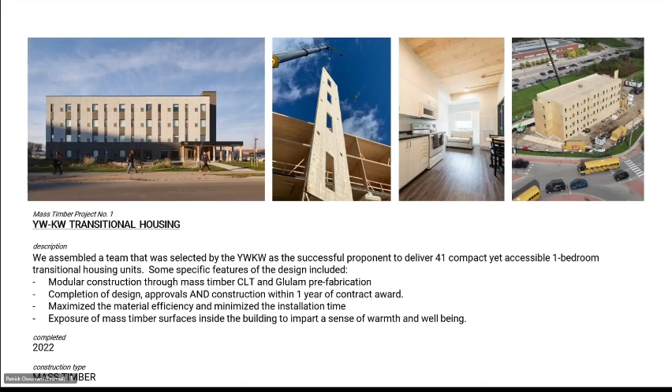Having been someone, along with Patrick, involved in and very interested in the mass timber movement for well over 10 years now, and seeing inroads like the Brock Commons project we saw earlier, you start to realize it's always about incremental gains project by project. So these were some of the key and ambitious targets of this project, which we'll show as I flick through pictures of the completed project and how it was executed.

I don't have any sort of weird twitch, but my cue for Patrick to change slides is to touch my nose. So just so everyone knows, we'll let you behind the curtain on that.

So you can see here some of the finished pictures. This is a really good view of the overall site. I'll get into the entire group of stakeholders outside of our design build team, which included the Region of Waterloo, the City of Kitchener and various others. You can see the building in the foreground, which was building 1. This picture was taken this past fall, and there's a second building going up. We were successful on the first building to the extent that we've done a second building adjacent. Behind is St. Mary's High School and the Kitchener Public Library as one large building.

And you can see that parcel of land that's really bordered by Blockline Road and a number of other more minor streets and roundabouts, that it was really an underutilized piece of vacant land that was city owned. And so being able to capitalize on taking this building type and dropping it in here was quite the feat.

One thing also just to note too, before I get into some more specifics on the process, the housing for building one that you can see, which is a 4-story building, was transitional housing for women battling homelessness. The second building that you can see, the 3-story building, was actually supporting women with children, so families.

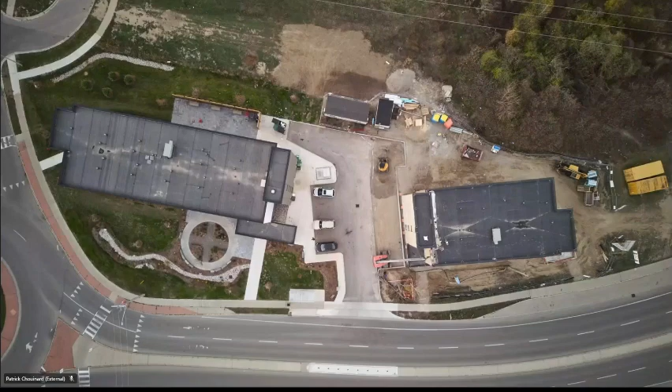So just wanted to give a high level on the Rapid Housing Initiative. So this project for YW was funded through the CMHC's Rapid Housing Initiative. As some of you may be familiar with, the RHI program was first announced for round 1 back in October of 2020, which was around $1 billion of available funding for not-for-profit and supportive services organizations to provide much needed housing for specifically vulnerable populations.

So both the RHI program as well as the National Housing Strategy from CMHC really look at a human rights-based approach to housing, and I think for our team, for our firm, that's something we're very much in line with, about how we can do that in an inclusive way with our building solutions, so that a certain type of construction isn't stigmatized to one specific type of population. So that was important for us.

One thing also about round 1 is there was a requirement, in addition to the 12-month timeline from contract award to occupancy, again, very aggressive. There was also a specific focus on modular construction as part of round 1 of funding. For us, in this case, we were able to utilize the prefabricated nature of the system out of the Element 5 state-of-the-art facility as meeting that definition.

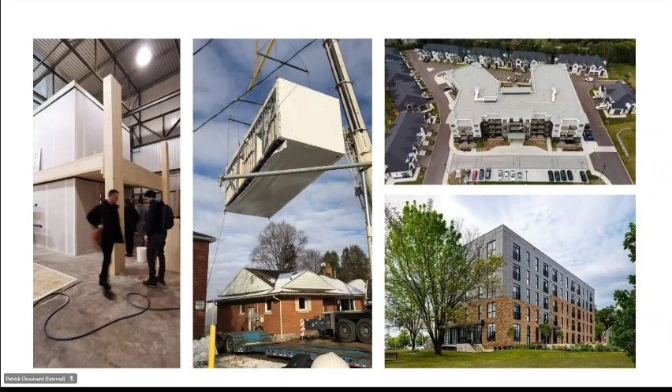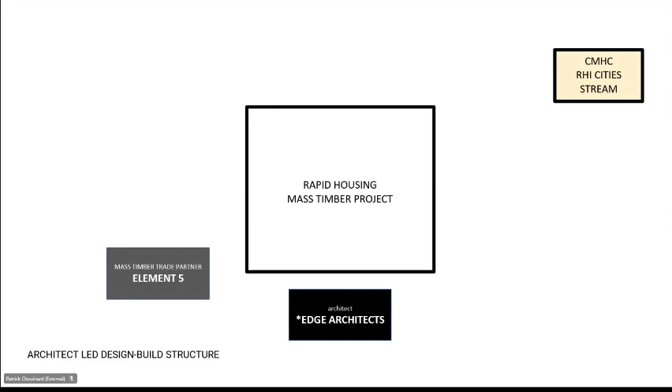So when it came to the announcement in October 2020, that's again where we had that pre-established relationship with Patrick and Element 5. So there were some conversations that we had early. We were also, again, very tapped into the local supportive services provider market, and everyone heard about this RHI funding stream that was coming down. So we started some really early conversations between Patrick and myself, and then started expanding the network and group in terms of what could a team look like and what could a delivery model look like for achieving the objectives of this RHI.

When everything came together, we had Melloul Blamey come on as our really key player and our general contractor, and our work with Melloul Blamey has often been as that construction manager and someone who really takes that huge amount of ownership in the work. And so they were able to come to the table with a specific response to the RFP request for a CCDC 14 design build, basically a turnkey solution to the funding and the objectives that were laid out by YWCA.

And then along with Melloul Blamey and their leadership on the team in that direct contractual relationship with the client, off to the right hand side, we had all of our trades and consultants that were brought on, and not in a conventional way, but actually in almost an integrated project delivery type of model. Even though we were tied into using the CCDC 14, it was this definite idea that we have to get everybody at the table very early and have that communication and those lines of collaboration really strongly established.

And not only did it stop there, but as you can see up above, the Region of Waterloo was the source that the funding came through, the city stream RHI, and then the City of Kitchener was actually the landowner. And so between the two groups, even in our multi-tiered system, it was really essential that they were at the table, not as something that we were working against. Oftentimes with approvals authorities there can be some friction in terms of how to move things through, and a lot of complaints about timelines to get those approvals, permits and alternative solutions. We were able to avoid that by having them very much be stakeholders in the project, and that helped greatly as well.

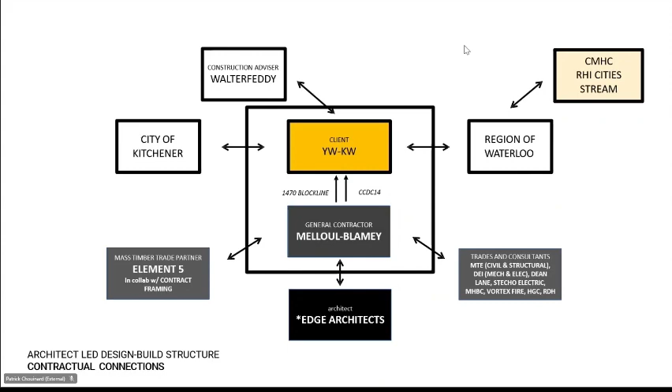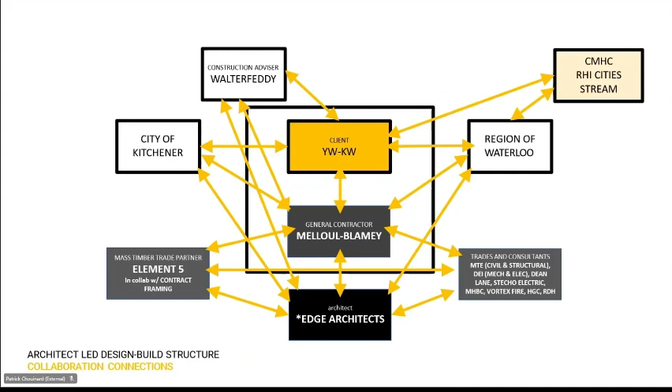So again, as you can see, the collaboration and connections between all of those groups, we really fostered them and pushed and promoted them as much as possible. And that was a really key piece. And I'm sure Jeff and maybe some of the others are going to go into that a bit more.

So in terms of the overall process, in order to work backwards from this extremely aggressive rapid schedule of 12 months, we really had to break things down into major sections and major deliverables with timelines associated. And so this was an infographic that we used at the table with those groups, not just our internal team, but the entire stakeholder group, including the authorities having jurisdiction.

So really it was about how quickly can we fast track and get through that planning, approvals and permitting process? Then how can we minimize and make the site work process go as quickly as we can, along with the foundations, right on the heels of that? And how can our design be done in a way that helps to streamline that? Same then goes with the superstructure that we're going to see with our time lapse.

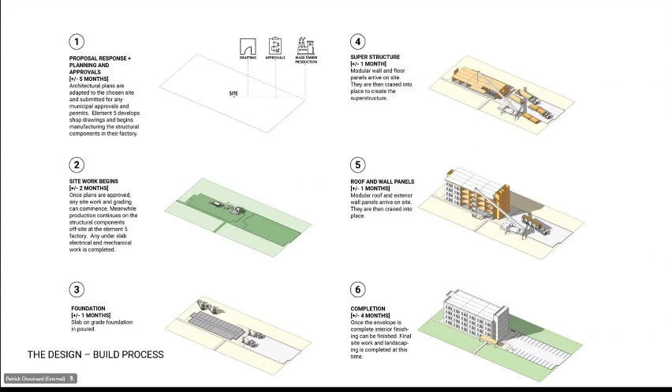The superstructure and that rapid assembly of the prefabricated components was a really key aspect of the project, and looking for ways that we could make that as efficient as possible, but do it with expertise of the whole team and of the checks and balances. And then finally, obviously leading to the full completion of the project. Next slide.

One of the key parts in terms of the mass timber itself was really trying to optimize the structural properties of mass timber, and having Melloul Blamey on board was really helpful at the early onset, knowing that we had to be competitive in a RFP tender, that our pricing had to be in line with some of the other groups coming in, but yet we did believe in this mass timber solution, because of the timing specifically, if we could get the efficiency optimized.

For a lot of us in the design community, mass timber had at the time been considered a high-end or expensive product, so we thought we could capitalize on something as simple as what is the optimal range of the mass timber panels, how are they supported, and how does that compare to something like precast. Melloul, with their extensive experience working with precast and their historical data, was really helpful.

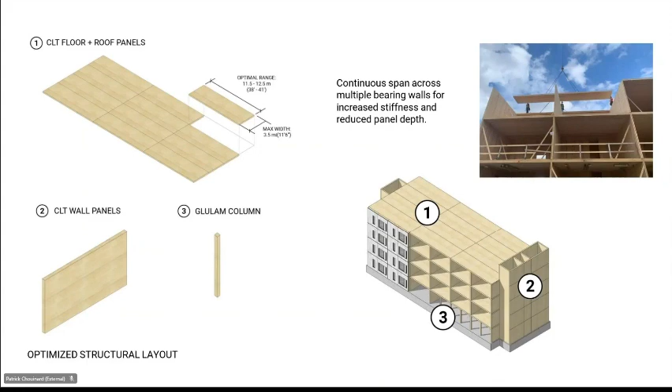Same thing was in the stairwells. Obviously on a 4-story and a 3-story, we were able to fully take advantage of that optimized span for our cores and vertical circulation through the space, as you can see here in the finished image.

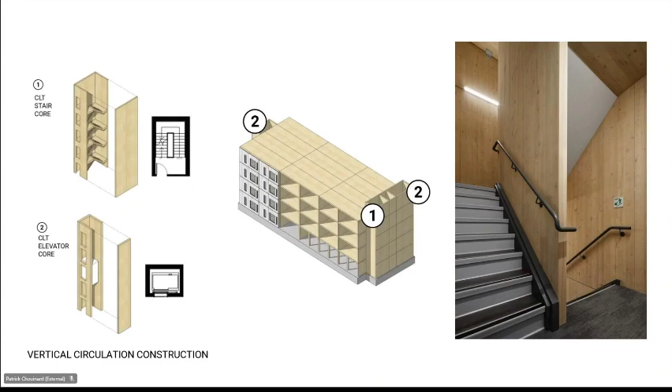And then in terms of the overall building layout, it's a pretty typical slab style building. However, if we go to the next slide, the typical width of that type of slab would be in the 18 to 20 meter range. In this case, we had a program requirement from YW that they wanted specifically smaller units. And we also had some site restraints of this vacant land parcel that had some weird geometry to it.

We realized if we used both of those things and narrowed the building footprint, we'd ultimately get the unit area that we needed, but also with a very flexible and adaptable unit layout that we knew we'd be able to adjust over time to suit the needs of other types of programs, and also create a very comparable apples to apples building layout that we knew would be scalable and adaptable in the future.

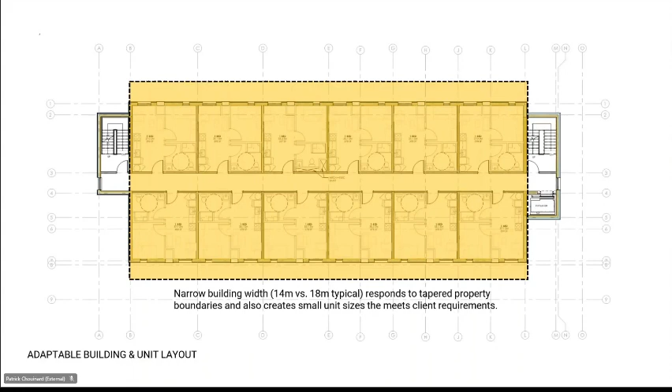So in terms of the unit layouts, one of the really key parts was knowing that this was transitional housing for women coming from very vulnerable situations. The ability for them to have a door that they could close when they went to sleep was really important. It was driven by the client, but also from us. We didn't want these to be shipping container, bowling alley style units that weren't going to create that sense of warmth and well-being.

So one was through the programmatic use of the space, that more squared proportioned unit that would allow us to not have large, super generous rooms, but rooms that were very functional for the needs of the actual user.

And then layering on top of that, the idea of exposing the mass timber surface in order to get those biophilic advantages, the sense of warmth and well-being. Seeing very literally the women that are coming in and moving here, coming from encampments, coming from homelessness, and being able to see in real time that value come to life was pretty special.

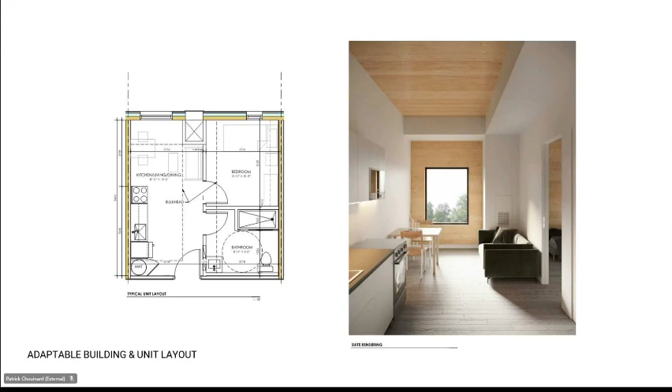So one thing, obviously, and I won't go into too much detail, just because we did have Vortex Fire Solutions on the team, who offered a lot of expertise and a lot of ability to be able to connect this wealth of testing data. And as Brock went through, that is something that in the industry there is quite a bit of right now. So a lot of times it's about taking that testing data and taking that conceptual understanding of how mass timber performs in fire, and just making sure that there's a comfort with the building departments and chief building officials.

And so one of the key things we did on this project was actually find other projects that had alternative solutions approved, particularly in the GTA, and then made the connections, not just with the documentation, but actually with the personnel, so that the collaboration wasn't just happening between us, it was actually happening between other building departments in various jurisdictions, so that they could understand and get that comfort. And we fostered that type of dialogue.

We've continued to do that. So now, every time you bring someone onto the team on the approval side, you actually have an ally and a resource that you can use. And we've since obviously expanded this program and executed it in York Region, multiple projects in Kitchener, and we're looking to continuously grow that with even a project upcoming in Hamilton with this same team.

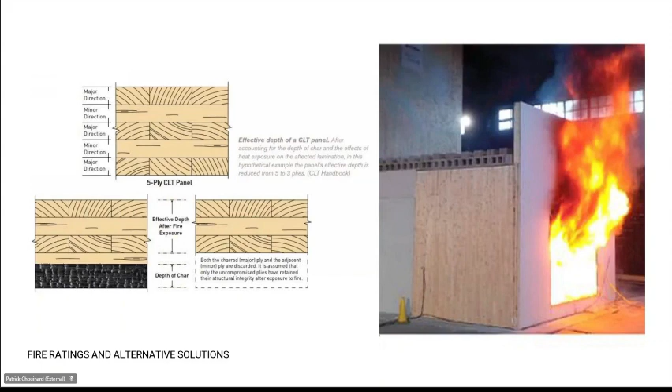Acoustics, I think Jeff might touch on this briefly, but that's one of the areas that's unlike the fire performance. Fire performance, there's been a lot of testing done. There's a lot of documentation available out there. The acoustic performance, particularly of exposed CLT, there isn't actually that much data out there, and combating that along with a specific change to the OBC classification of residential acoustical performance, where it went from 50 STC basically down to a 47 ASTC, actually made it challenging for us on the fly.

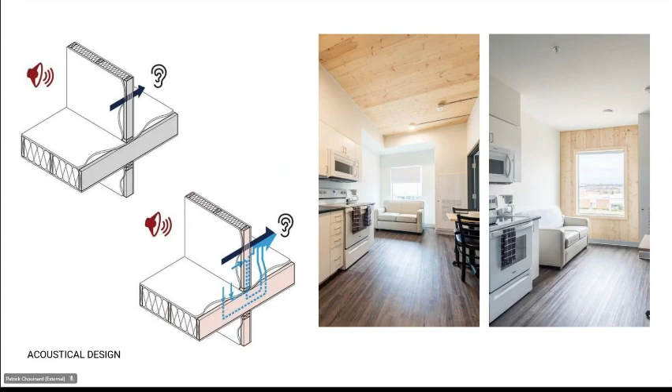So this was one of the areas where we really had to, in terms of both lessons learned and utilizing the expertise of our team in terms of Element 5, Melloul Blamey, and HGC Engineering, who we brought on. We ended up having to, in the moment, come up with a way to deal with something called flankage, which is when you have these exposures and that structure spanning over multiple points of bearing, it opens up this ability for sound to flank through those cracks and crevices. And that was something we had to deal with in real time.

And so what we ended up doing was coming up with a somewhat innovative checkerboard design solution where every other unit had either an exterior wall or a ceiling exposed, and that way we were able to get that advantage of the warmth and well-being that I stressed, but yet also do it in a way that we were dealing with a worst case scenario and a very conservative design.

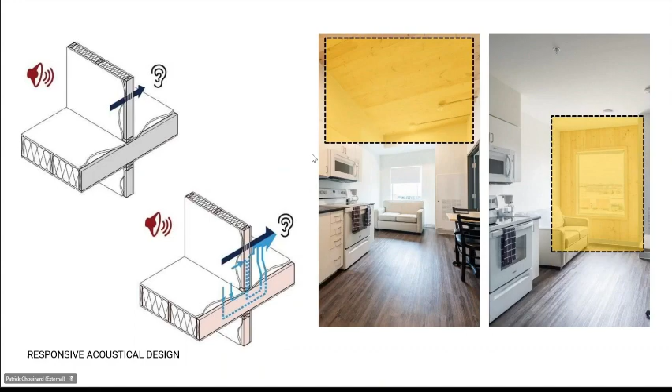After we were able to do this, we worked with HGC to actually get acoustic testing completed, because the challenge is HGC had to sign off on the design, but they didn't have a body of testing data that was robust enough for them to do it without going very conservative. So luckily, we're happy to report that between the testing of this and a few other buildings over the last couple of years, we've actually been able to show that the product performs better, particularly in flankage and exposed conditions, than was previously designed to. And so that was one of the great takeaways for us on this project.

Ultimately, we realized, just because of some of the procurement challenges, some of the fabrication facility setup things, and this timeline, we ultimately ended up going with a thickened insulation EIFS system that was very high performing, with very minimal thermal bridging. So we knew it was going to be high quality, but it also really limited the number of trades and the number of steps in the process required to do it, which allowed us to ultimately meet the timeline.

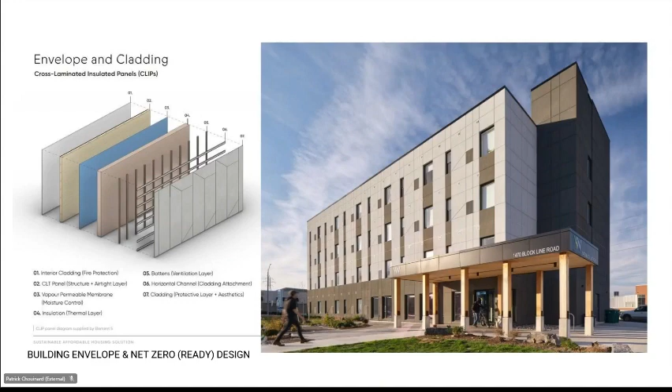So that's something I think we're keeping on the boards for us in terms of looking to ways to evolve and refine that, but specifically having RDH on the team, not just through the design process, but in terms of the actual execution on site and the checks and balances that were in place for the envelope, as well as the moisture control, was really key.

So finally, when it comes to the BIM coordination, and you can see Kurt, our installer here on the truck, there was a lot of BIM coordination done with actually all the trades and consultants in the early stages on the design, and that was a key component. But I think with specifically this rapid style delivery, what's also really critical becomes the collaboration in the field. And that was something that was actually really exciting for us.

And I think for all of the consultants, it necessitated us really being there. And again, more that triage approach to all be there at the table consistently. I believe we basically had a weekly meeting that started at the beginning of the project and ended when the project ended. There was that consistency to everyone's engagement in this fast track approach that was really unique and exciting for us.

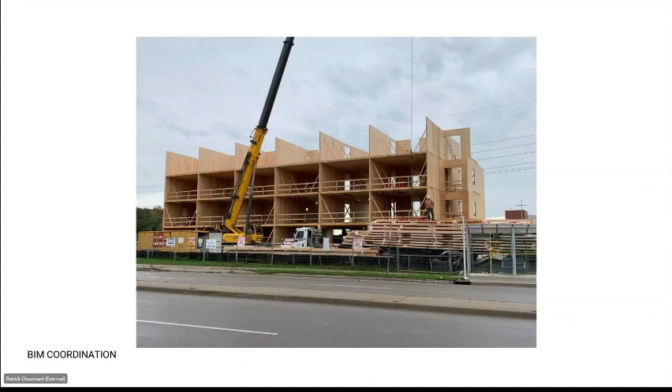Yes, thank you, Matt. So we wanted to demonstrate how quickly we thought the building was going to assemble. So we placed a time-lapse camera on the adjacent building. I'll just let this video play in the background. It's short, it's about 2 minutes. What you'll see is the first day that our materials arrived on site. Within 8 days, you'll see that 2 stories of the building were assembled, and within 20 days, the superstructure of the building was completed.

So let me just make sure that the volume is turned down here. And I'll allow this to play. I don't think it's a big deal, Patrick, but we don't have the volume on here. Yeah, that's okay. I've decided to turn the volume off. Can you hear me? Yes, we can. Great.

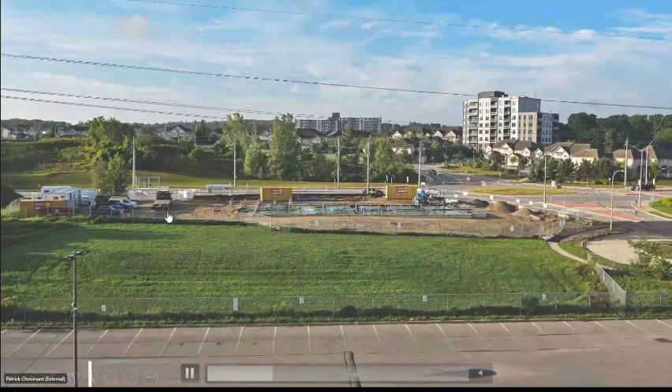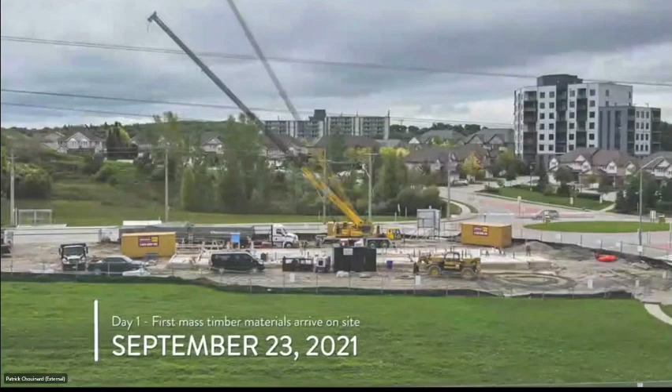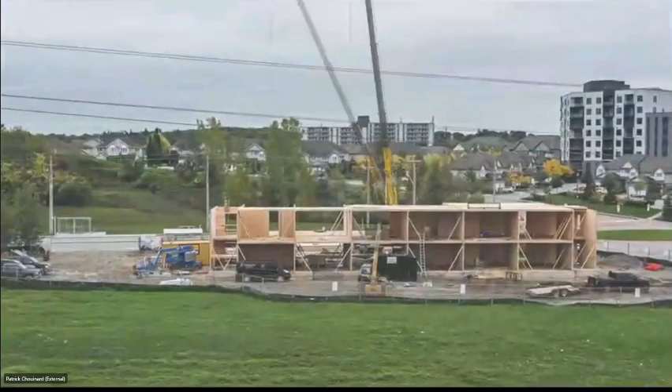So here we are. This is day 1, September 23rd. This is the first day that our materials arrived on site. Every panel is pre-cut in the factory. There's no cutting of the materials on site. Here we are, day 8, October 5th, and you'll see 2 stories of the building having been assembled. You'll see our exterior wall panels being erected here soon. Those are about 10 feet wide by about 45 feet tall.

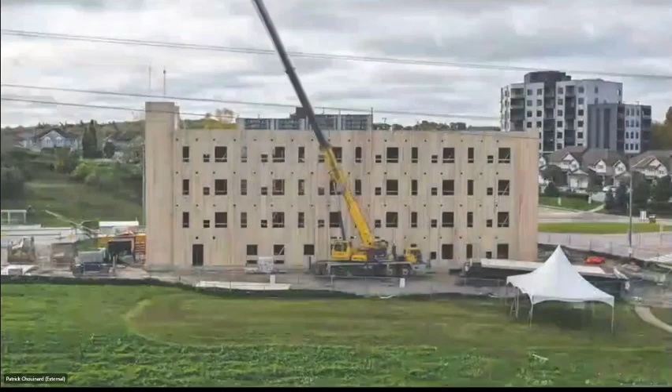And here we are, day 20. So within 20 days, we were able to assemble the entire superstructure for the building.

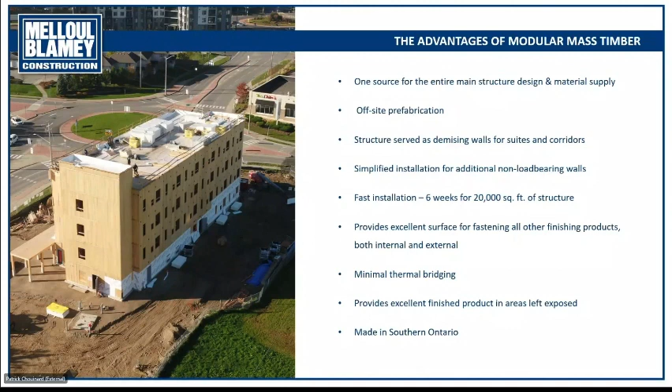And as I think Matt and Pat also mentioned, it's made in Southern Ontario, but as far as I'm aware it's the only facility that manufactures in Ontario. So that's pretty significant for procurement and getting the product delivered to your site.

The one thing that you want to make sure of is the foundation. In this case, we had a slab on grade, and it had to incorporate all the specific anchors. And when that work was done, we basically had a concrete slab when they arrived. It made it very easy for the installation when all the anchors were done properly.

The next piece is to ensure sufficient moisture protection measures are implemented, just because of the wood nature. There's no doubt that the CLT is very dense. It's the joints that you have to be prepared for, and when the proper measures are specified, with tapes and other types of membranes that can go over, it's very easy to achieve the moisture resistance that you need until you get a roof on.

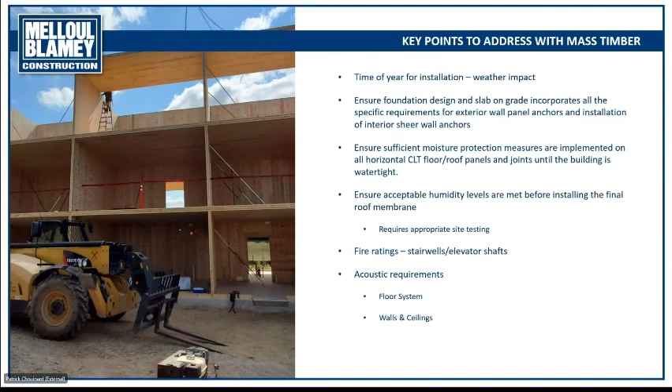On Matt and Patrick's side, we were trying to expose everything, but that wasn't possible in this. But I think this particular job did lend itself to testing that's going to help the whole industry, because it was one of the first of its type to go out. So we learned a lot, and hopefully in the future more timber can be exposed because of that.

But with the structure that we did, the size of it, to be done in 6 weeks so we could start a roof right away, that just helped us in the overall time frame, probably by about 2 months at least, to get a jump on having the building watertight and finishing inside.

And last, the biggest thing was the significant advantage of having one trade doing both the wall and floor system and the whole structure. Again, it was just a time saver. So it was really a good learning curve for us, and now we're full proponents of mass timber construction.

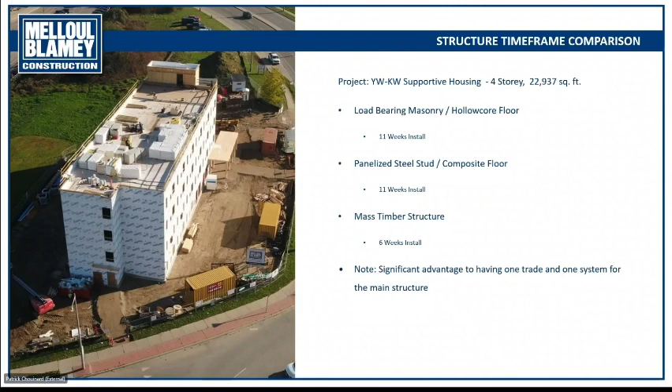My name is Jonathan Smegal. As was mentioned, I work for RDH Building Science, and so I was asked to talk a little bit about the enclosure considerations for CLT or mass timber construction, as well as some of the input we had on site regarding water management as well as design.

So first, what value does RDH bring to the project? Well, besides being locally in town, just down the street, which provides a lot of convenience, we have a lot of experience with mass timber over the last several years. Our largest offices for RDH are on the West Coast, and that's kind of where mass timber in North America reemerged several years ago and has moved over to Ontario after that. So we had a lot of experience on the West Coast even before it came to Ontario.

We've had experience in design, construction, walking the site, as well as dealing with lots of different failures and challenges that have emerged as part of this relatively new construction technology. RDH has written a few industry guidelines, including the mass timber best practice and moisture risk management strategies. We've also run two multi-day symposiums on mass timber, one on the West Coast and one in the New England area. We've done a bunch of field testing, as was just mentioned.

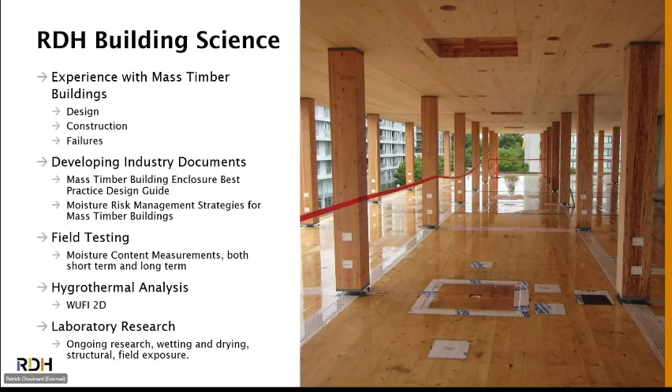And the fire control that's been mentioned a couple times. Just in June 2022, there was the full-scale fire test at the Canadian Explosive Research Lab. The photos that Brock showed earlier were from that test, and the results were quite good based on that large-scale test.

So some of the challenges with mass timber is that wood is a hygroscopic material and is moisture sensitive, so it will absorb water. And the amount of absorption is dependent on the orientation of the wood. The end grain, obviously, absorbs more water than the other surfaces, and so we need to be careful about that, and we need to take time to protect it.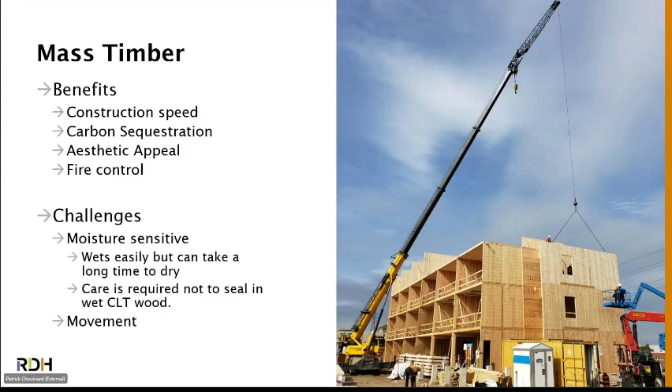And another challenge is movement, not necessarily with large CLT panels where everything's glued together, but with other types of mass timber like NLT or DLT, we can get movement and expansion, which can cause challenges. But in CLT also, if you wet and dry enough, the individual pieces that are glued together on the different layers will expand and contract separately. And sometimes we've seen over extended periods of wetting and drying that they can start to separate a little bit and leave checks, leave cracks, and separate from the glue.

So specifically regarding this project, as it was mentioned, the upper image is kind of a graphic from one of our guides, and the bottom graphic is specifically from this project showing the assembly. One of the nice things about CLT construction is that because of the aesthetic value of leaving exposed CLT on the interior, it often lends itself to the perfect wall construction.

And I don't know how many people are familiar with what we refer to as the perfect wall. It was a phrase coined many years ago now by Joe Lstiburek in one of his documents, but it's gone by a lot of other names like the outside insulation technique, or called PERSIST in the past. What it means is that you have the structure on the interior of the enclosure, and then on the exterior of that, you have all your control layers that control water, air, vapor, and then you have your insulation on the outside of that.

And so what that does is it controls the temperature fluctuations and extremes of both the structure and the control layers, improving the durability of those. There's often less thermal bridging because you cover all the ends of the floors and everything that sticks out. And in this case in particular, the insulation and the cladding was an EIFS finish, and it was adhered, which means that there were very, very few fasteners bridging through the insulation. And so there were lots of benefits there.

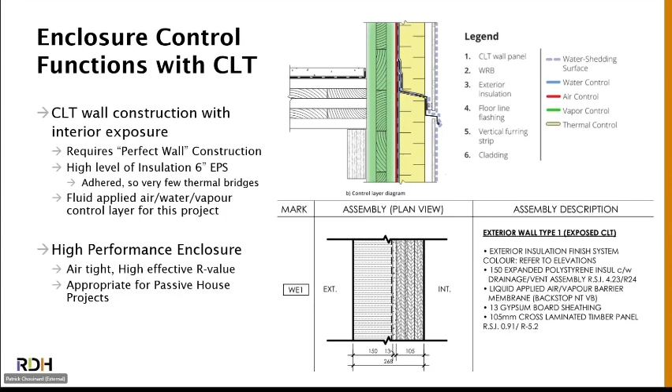One of the other challenges, besides the wetting challenge, is some air control challenges. In this project, because everything was on the outside and it was a fully fluid applied air, water, vapor barrier, it was not as much of a challenge. But we've seen a whole range of these types of buildings. And what happens is anytime you have 2 panels coming together, you have a possible air leakage path under pressurization. Pressurization can occur due to mechanicals or due to stack effect in taller buildings.

And this can lead to air leakage both through the panel joints, but also in some cases, depending on the panel itself, if there's cracks or small joints between the individual pieces of lumber that form up the plies of these CLT, you can get air leakage through those. So for example, if we look down this parapet, this was not the finished parapet. There was a self-adhered membrane that went on the inside surface of this parapet just for this reason.

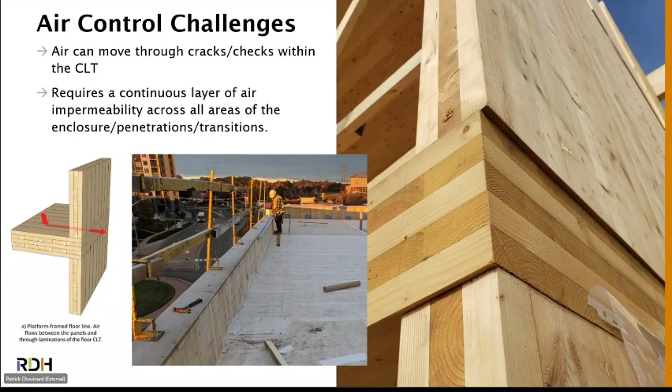But if you look at the waterproof membrane that goes across the roof and then up the parapet, it is possible, if there were joints between those pieces of wood, that you could get air movement all the way from the interior to the exterior of the building across the roof system because there'd be gaps between the wood. So you need to take that into account in design. And that's one of the other main challenges of these mass timber systems, more with dowel laminated and other types where there's larger intentional cracks, less so with the CLT, especially as you can see in the photograph, the joints between the pieces of wood were quite tight.

So the greatest challenge to mass timber construction, as has been pointed out, is keeping the wood sufficiently dry throughout the project. It's not that the wood can't get wet at all, but you really need to be careful on how wet and then how often, and give it time to dry. And maybe your assembly allows for drying to the interior, maybe it's vented. So there's lots of ways you can address that.

And moisture absorption for mass timber elements is not instantaneous. A long-term or persistent exposure to moisture is likely to be more problematic to the mass timber elements than the overall quantity of water. And so in just some of the different problems that we've observed in the past, and this goes from the left to the right, from a higher likelihood of occurrence to a lower likelihood of occurrence. The most common is just schedule delays. You get water, it damages surfaces, it drips long term. You have to delay certain things because of that.

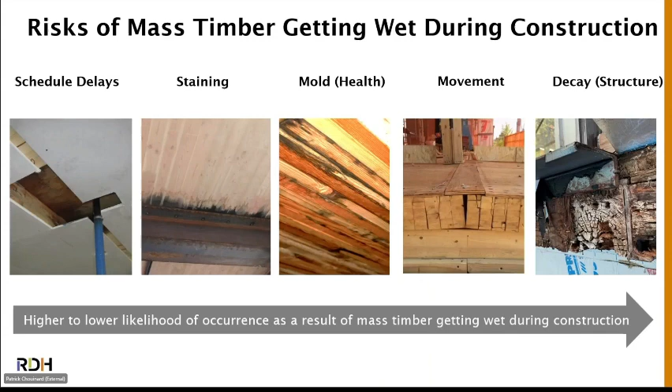Second, you can get staining. And so I know in some projects, they actually have a budget to go back and refinish the interior wood to take account of any dripping or staining that has occurred. You can get mold, obviously, movement, like I had mentioned, and decay, which is obviously an extreme example. We rarely see it, but it can happen. And it's mostly not during construction, but afterwards, if you seal something up when it's too wet and it stays wet for years, you can get eventual decay of the material in that environment.

But I mean, these are easily manageable. You just have to start early. And so step one is to complete a moisture risk assessment for mass timber assemblies. And so that's things like identifying climate, expected rainfall, construction schedule, season, length of exposure, type of mass timber, floor or wall, because they will be different. Two would be a construction phase moisture management plan. So it defines all the activities the construction team is going to take to reduce the moisture related risks.

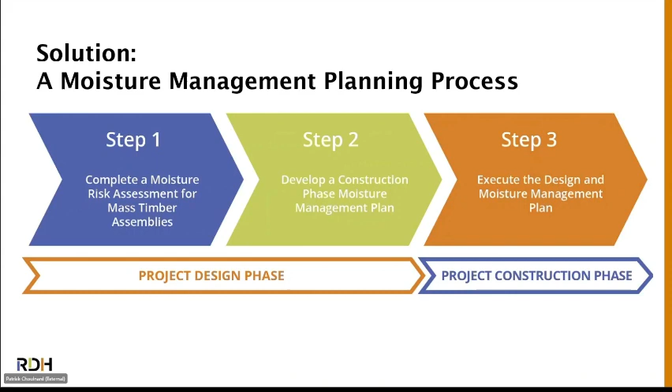And then step three is to execute the design and moisture management plan. And so if that plan is followed, the project will be protected in alignment with the design, construction, development team's expectations, and the entire project team will be well prepared to respond to not just expected, but unexpected moisture exposure events. So in step three with the project construction phase, there are different levels of things we can do. And so it depends on all of those things that we just talked about.

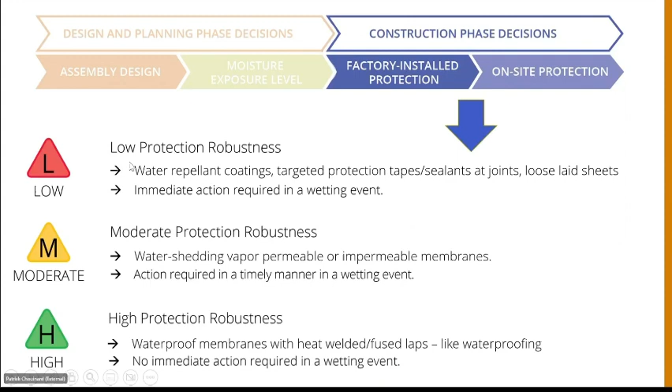There's low protection robustness, which just might be water repellent coatings, targeted protection, tape, sealants at joints, loose laid sheets. There's moderate protection robustness, and we're going to look at a couple examples of these. So water shedding, vapor permeable or impermeable membranes, and then high protection robustness. No immediate action required in a wetting event. The moderate is action required in a timely manner, and low is immediate action required in a wetting event. So we're just going to look at some examples of this based on some of the projects we've been on, and then continue from there.

Moisture is definitely the nemesis of mass timber construction, but we're learning lots. We have lots of strategies, and there's no reason to be concerned if you have a plan and implement that plan.

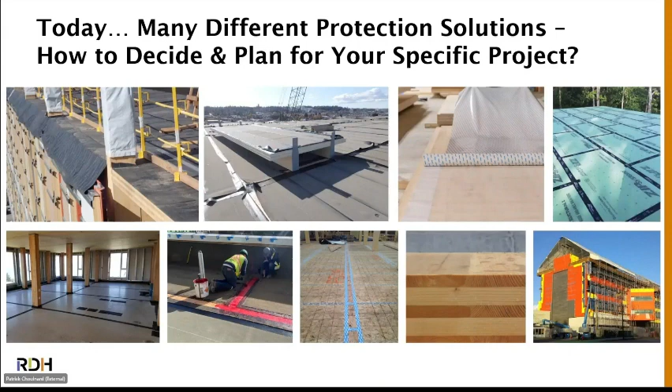Thank you very much, Jonathan. So Element 5's role as mass timber manufacturer in the project. The project started as an idea, and Matt mentioned this early on. Matt and I had worked projects together previously, and we thought, if we're able to build buildings cost competitively, we can build them quicker, and we can create these wonderful, healthy environments for people. We thought, well, maybe we have at least part of the solution to Ontario's affordable housing crisis.

Secondly, Matt had decided that we would bid this project, and he put together the consortium of people to go after it. We became an integral member of the bid process, and then once we had won that project, we became a member meeting on a weekly basis throughout the entire project through to its completion.

We were responsible for the timber engineering, and that meant deciding on the member sizes, the thickness and size of the glulam elements. We designed all of the steel connections, and most importantly, we were involved in the optimization process in order to figure out how to utilize as close to 100% of the standard size CLT panels that we're able to manufacture to minimize the amount of waste and to facilitate constructability and the speed with which these buildings will assemble.

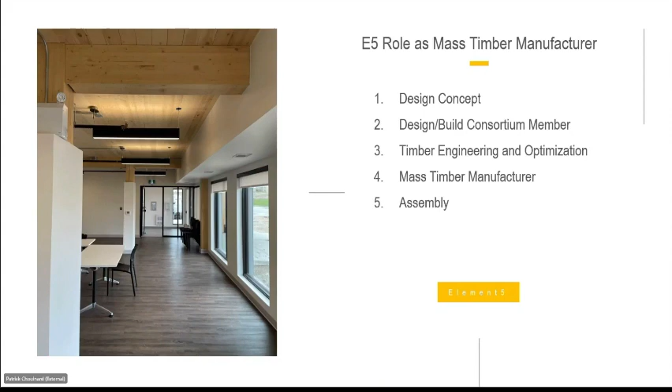Of course, we acted as the mass timber manufacturer to make all of the glulam and CLT components and supply all of the steel connections, and our contract included the assembly of the structure as well.

There was a lot of lessons learned. This was the first time that a project of this type, this panelized CLT structure where you're using CLT both horizontally and vertically, had been done, and particularly in affordable housing. So there was lots that we were able to learn from this experience. The one thing that we learned was that mass timber is cost competitive.

There are many misperceptions when you're working with mass timber, and one of those misperceptions is the commonly held belief that, as a general rule, mass timber is more expensive than other forms of construction. That may have been true previously when mass timber components were being shipped long distances, from British Columbia or from Europe, for example. But now we source all of our materials within Ontario, we manufacture locally, and we deliver many of our projects locally, which has driven down the cost of mass timber.

We chose to go after affordable housing for a number of reasons. The first is there's a huge need for affordable housing. Between Matt and I, we figured that this is an opportunity for us to make a positive contribution to help overcome the affordable housing crisis. The second reason was we said, if we can prove that we are cost competitive in the affordable housing space, where margins are incredibly tight, then we felt confident that we could be cost competitive in other building typologies and other sectors of the marketplace.

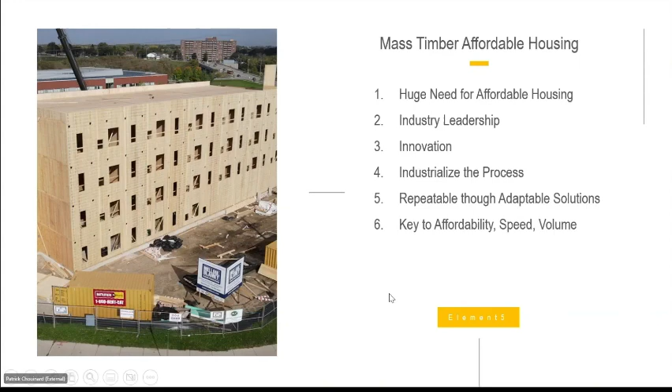of industrializing the process. And so what we're trying to do here is to create these repeatable, though adaptable, off-the-shelf solutions in order to reduce overall costs, to make these buildings much more affordable, to increase the speed with which we're able to deliver these buildings, and to increase the volume of buildings that we're able to supply to the need in the marketplace.